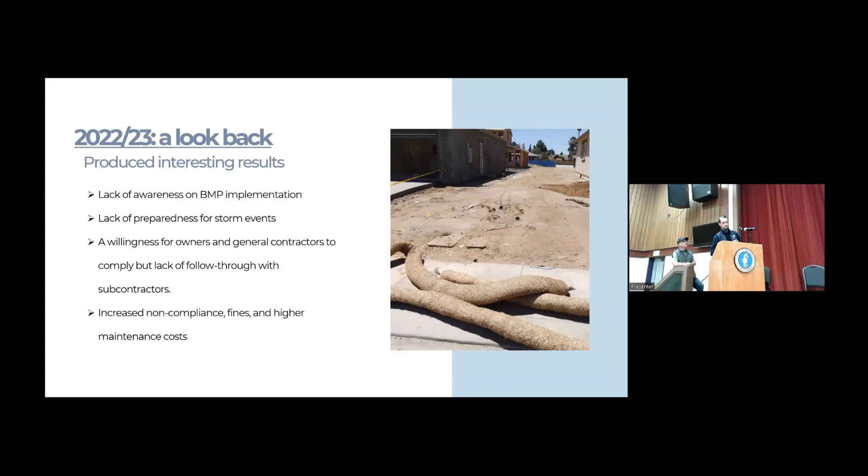So this one is a clear example of erosion, lack of run-on controls, and lack of sediment controls.

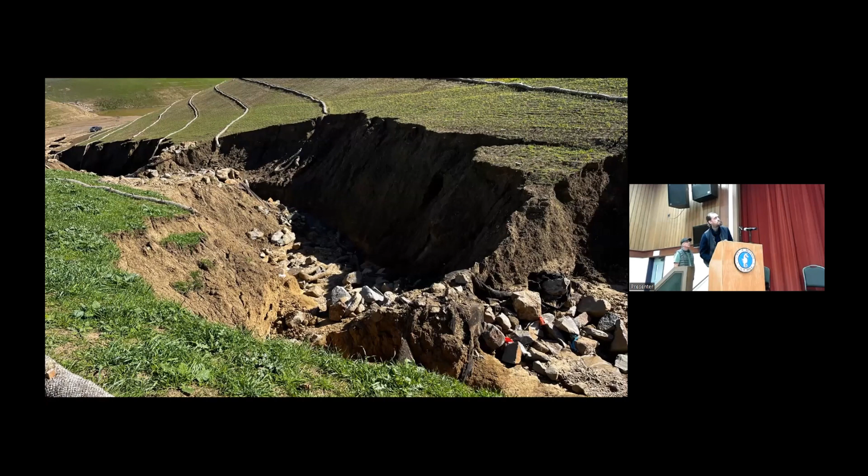This was a site that I inspect where it's almost impossible to really see the vastness of this erosion, but that gulch is a good 50 to 60 feet deep. And this had check dams, erosion controls, sediment controls, like you would not believe. It was really quite good.

But the main problem here is there was just a massive amount of sheet flow, or what you might also call run-on, where sometimes it just doesn't matter. Your BMPs can only get you so far when you have 12 atmospheric rivers hitting you back to back. Sometimes you're just going to be in a world of hell.

But the main problem with this site right here is the lack of terracing, because this is a pretty significant hill bordering a small mountain. Terracing is something we don't actually talk about, it's not something I've really highlighted, but I'm convinced it should be an active BMP because it helps slow the flow in ways that check dams and fiber rolls can't.

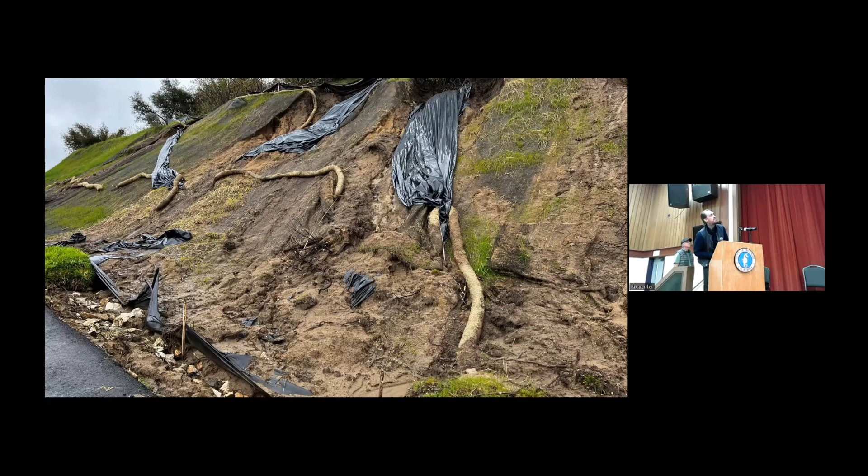So the thing with plastic, it's really easy and we like to use it, but there's probably nothing better that speeds up the velocity of water. And when it comes to velocity, that's pretty much our number one enemy when it comes to erosion sediment control.

So probably here we would recommend an erosion control mat, a blanket, kind of looks like burlap, as opposed to plastic. Much of this stuff is probably going to be pretty common sense, so forgive me for beating a dead horse here.

Sediment controls. As you guys can see here, it's pretty obvious what's happening. The perimeter controls are overwhelmed. That's something contractors don't really like to mess with - when perimeter controls, silt fence, fiber rolls, sandbags, get impacted with sediment, they sort of lose their effectiveness.

And a lot of the times they just don't want to repair or maintain perimeter controls. But it's a huge thing that we need to constantly implement, because as you can see, sediment is overwhelming this perimeter control and making its way into the street gutter.

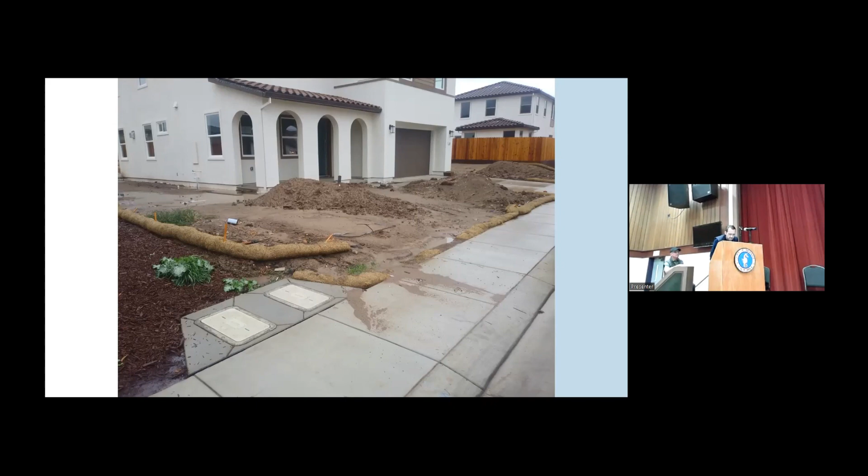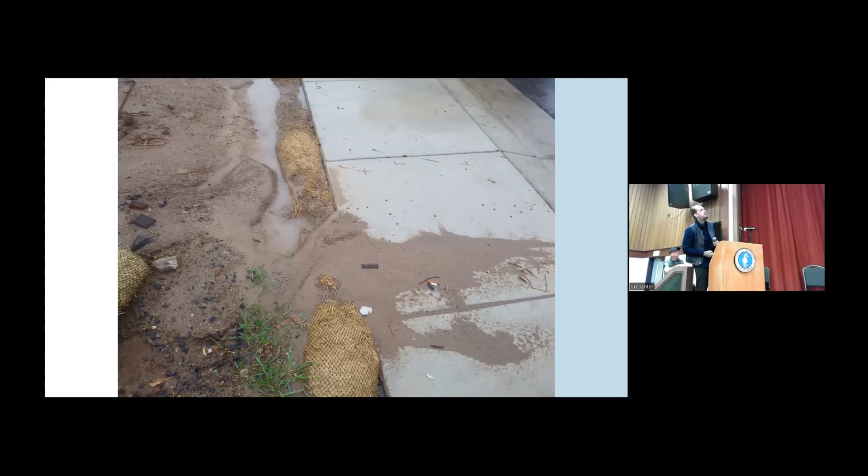More of the same there - just a couple of examples of perimeter controls that have been overwhelmed, and again, overwhelmed perimeter.

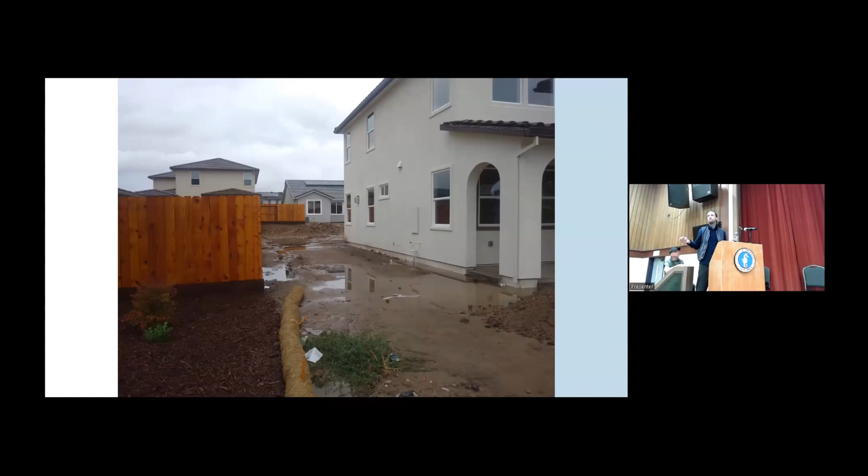The main thing here is just basically a lack of erosion control. Erosion control basically boils down to soil cover, any sort - mulch, straw, erosion control blanket. But erosion control is really the primary step to preventing major problems on your site.

You want your entire toolkit working together, it's almost like a prophylactic - a preventative is what you're thinking about when it comes to erosion. You want to prevent erosion by putting a mat down. You want to prevent the moving of sediment by having properly installed sediment controls, like this fiber roll, which is clearly not installed correctly.

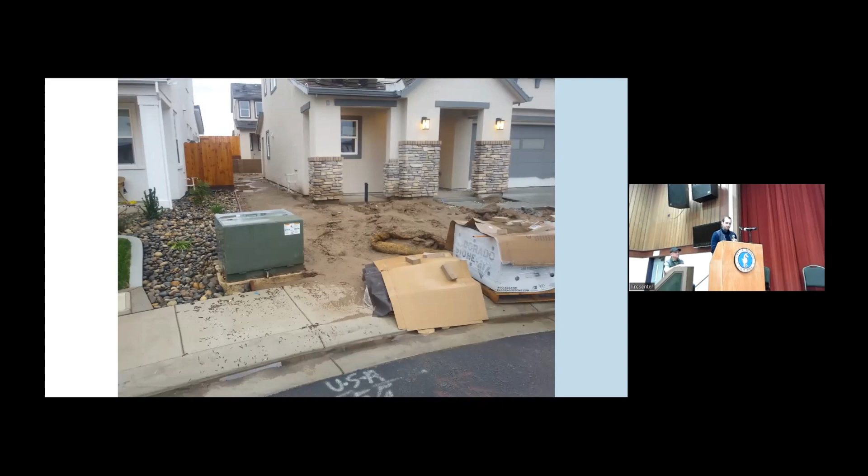This is an interesting one right here. We see this all the time. Now it doesn't look like that big of a deal, but obviously it's not installed correctly because the perimeter controls aren't on the perimeter.

A lot of times contractors will have a problem with this because the fencing will already be installed. They look at it as a serious hiccup and can't figure out how to make that perimeter.

It's really just laziness. It's obvious that we need to hit that perimeter. Wherever there's exposed soil, there needs to be controls.

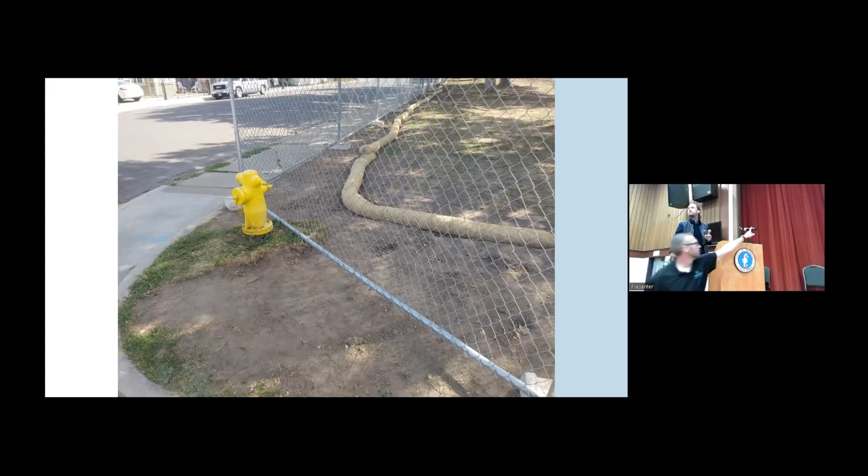Now, this would be okay if the exposed soil on the outside of this fiber roll was all vegetated. If they had either not graded it or if it had natural vegetation, then you could probably get away with this sort of chintzy perimeter control that they've installed here. Because again, one of the number one BMPs that we often exclude is just natural vegetation. So if you can leave a buffer of vegetation around your site, if possible, that is an amazing BMP, and it will seriously help you in the future.

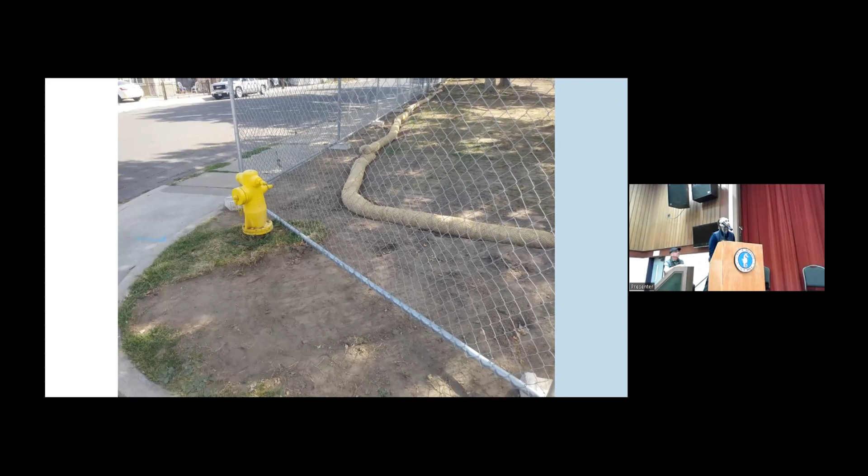Again, pretty commonsensical stuff.

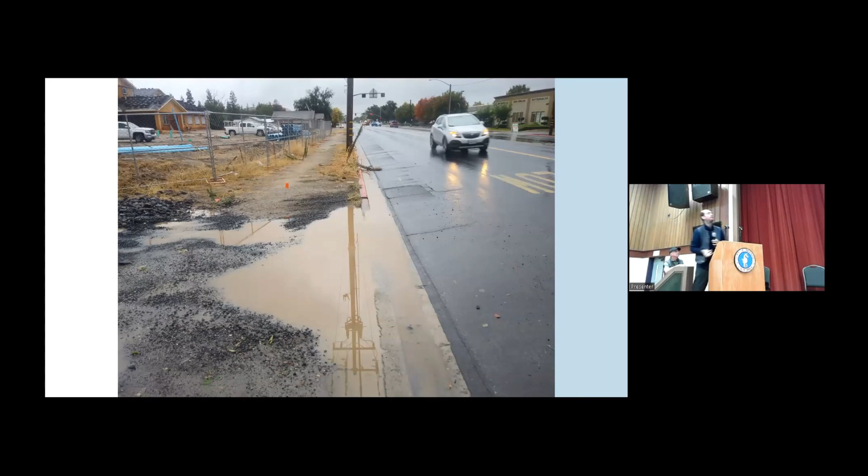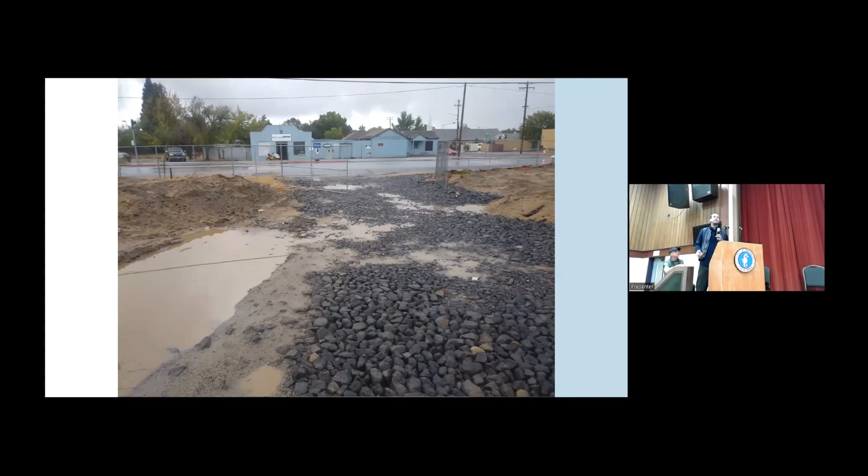Okay, so this is a track out. Now, what's interesting about track out, it's probably the most important location on your site, because usually state inspectors are so overwhelmed, the only way they're going to stop at your site is based on your track out. If they see track out coming out of your site, they're going to know that something else is messed up. If you're willing to allow the public to see such a disaster of track out onto the main street, they're like, okay, there's probably a lot more on site.

And that's what makes them stop, which I have some pictures of track out coming up. But what's interesting about track out is it's also often the lowest point on site. And so it can lead to a direct impoundment of water in probably the most important location on your site, the entrance and the exit.

And so that's an engineering thing you kind of want to keep in mind when you're first installing your track out: if it is at the lowest portion of your site, engineer it so it can take on some impoundment like this, because it's not uncommon for track outs to be filled up with water. But you can deal with it if you've got chunky rock or if you've engineered it deep enough where you can potentially pump it off.

But track out is a really important location on site. As you can see, it's just an absolute disaster. And I'm not going to get into the weeds, but now that we're in the 2022 construction general permit, something like this would actually require an additional permit to get that water off site. And not only that, it has to be implemented, if I'm not mistaken, 14 days before it were to happen.

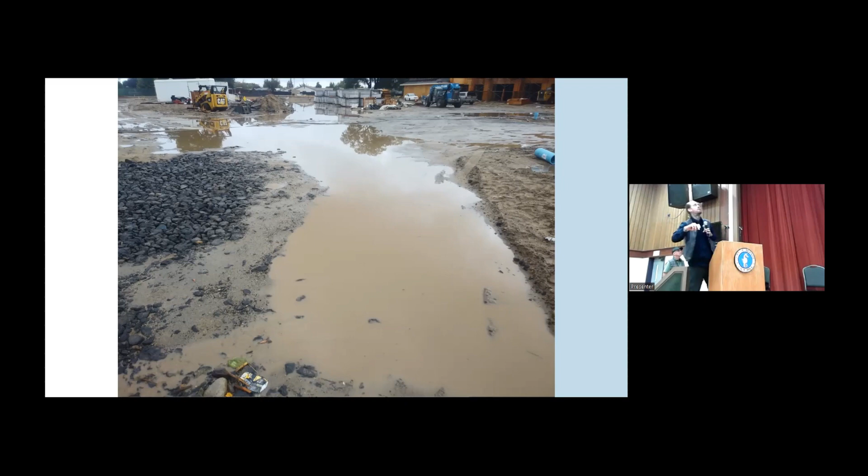Oh, look at that beautiful track out, all installed beautifully, but it's still tracking out. This happens. Sometimes your BMPs, you do everything right, and it's still a mess.

But that's where a sweeping program comes into play. Another BMP. It's kind of a pain in the butt, but sometimes you just got to have your guys with the broom at the end of each day.

You know, really, this rock is actually a little too small. Usually you want that big, chunky rock. But sometimes you can only get what you can get, and you just got to deal with it as it comes along. But all in all, this looks pretty good, but it's still a bit of a mess.

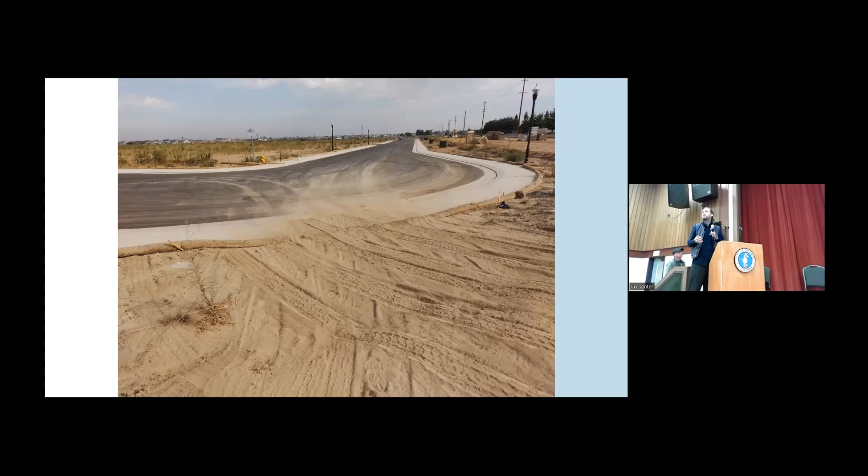This is for sure going to get you inspected by a state inspector, guaranteed. Because if you're allowing this to happen on site, they're just like, this guy's probably got concrete washout going crazy, porta potties tipped over, Lord only knows. But this is the number one way, if you've got a beautiful street without track-out, to keep serious inspectors off your back. We see this a lot where labor subcontractors get lazy and can't even move the fiber roll out of the way. So a lot of times as a contractor you're just running around trying to take care of your subcontractors to try to make them not cost you extra money. It's one of the joys of being a contractor.

Again, more of the same. You see all that sediment in the street gutters. Hypothetically, that's going to end up in your storm system, and God only knows what it's going to do as it keeps building up. For all you municipal inspectors and contractors, if you're allowing sediment into your storm system, I've heard of municipalities sending a robot down into the storm system and finding a ton of sediment. As a contractor, you've allowed that sediment in, and now you've got to get it out, which just means money. So it's good for municipalities to think about that.

These guys aren't listening to us, they're letting all the sediment into the MS4. And contractors, getting on your subs, guys, you can't let this happen. You're going to cost me a small fortune if they happen to check the MS4 prior to closing out the permit.

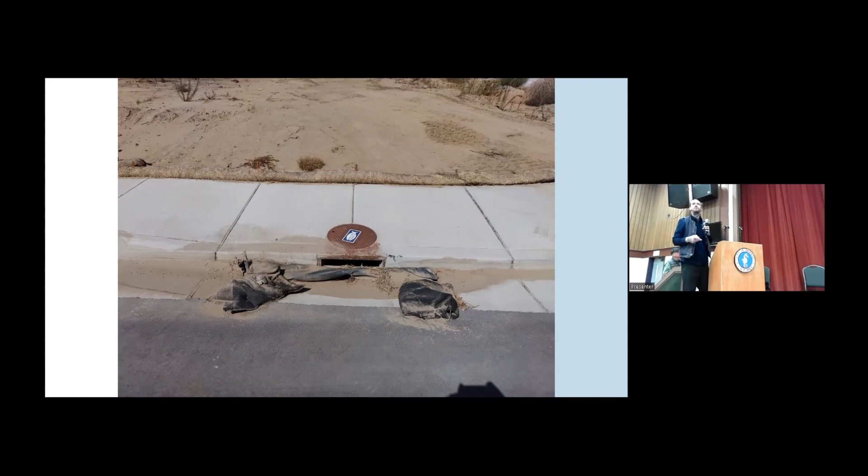In all seriousness, this is going to happen, especially last year when you have insane amounts of sediment coming off your site, you're going to run into stuff like this. It's going to happen, but get proactive—all that takes is a shovel, 10 minutes, you've reinstalled it, and you won't have someone like me freaking out on you when you come across this. And of course, the fish, direct to the river. So, minor details.

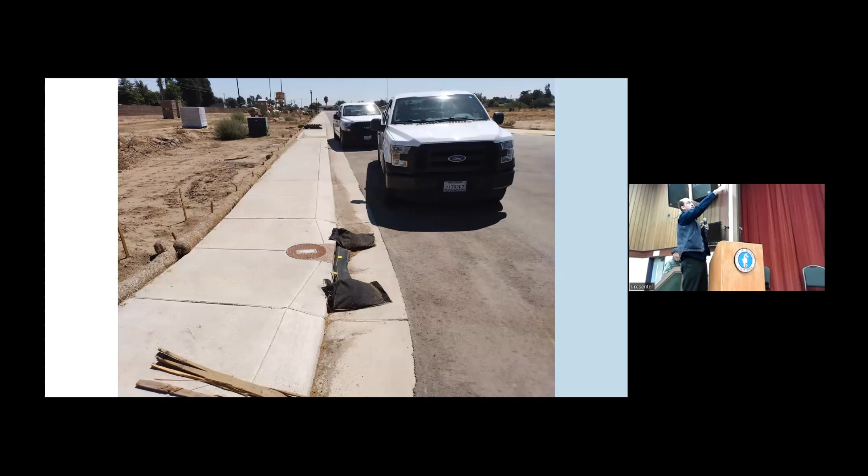This isn't too bad, you can see that the DI has pretty much done its job more or less. It's still a little rough, but the perimeter controls are pretty decent. There are no erosion controls though, so you probably wouldn't have any sediment at all if you had solid erosion controls preventing sedimentation in the first place. But at least that DI, they tried on that one.

Again, more of the same. You just want to get out there and remove that sediment if you can.

Okay, this is interesting. You can tell their heart was in the right place, but they've pretty much taken probably half a block's worth of BMPs and put it on one DI. You should probably take one, maybe two of those bags every 150 or so feet and put a little check dam.

I always try to remind people that you have a permit to discharge. You're allowed to discharge. Most people think, oh no, don't discharge—no, you don't want your water building up on site, you want it off your site. But what you're going to try to do is discharge water that's not packed full of sediment. So this right here is definitely going to catch sediment, but it's also going to create a terrible pooling effect.

I'm sure a lot of contractors and municipal inspectors will go around and see sandbags kicked away from the curb from when the storm has come through, and you're like, hey man, your sandbags are screwed up. And they say, well, it was puddling, what do you expect, am I supposed to have a puddle here? It's like, well, you do want the water to get through, you don't want it to puddle up that significantly. What you're trying to do is create a little catch basin with the sandbags, kind of like panning for gold, how when the river comes down the gold would deposit in a little spin out.

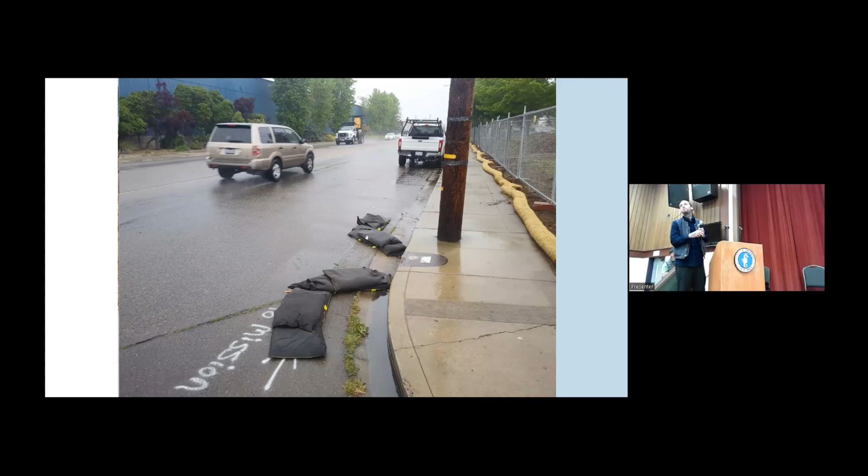Sometimes it needs 2 bags, sometimes 1, sometimes you need to prop the bag up. It depends - sometimes the street gutter is at an intense slope, sometimes the curb itself is higher than the average curb. But it takes a little trial and error. You want it to discharge, you just don't want excess sediment in your discharge.

This is actually a good example of run-on, even though it's technically erosion control. Not a lot of people understand that run-on can occur from your own site. Like if you have a site with perimeter controls, you'd think run-on, run-off controls are part of the 5 BMP categories - it's the 5th category. Run-on you would think is a site next to you running on, their water coming onto your site and impacting it. And run-off is water on your site that's leaving.

A lot of people don't understand the concept of run-on. They only think of it as someone else's site running on, but actually run-on generally happens from your own site. From the higher to the lower is run-on. From a roof to the ground is run-on. A lot of people don't understand that you usually cause your own run-on, and your own run-on causes you your own problems.

Because technically this is a lack of erosion control that led to a run-on from the top to the bottom, from the top grading to the sidewalk. So this is just something to keep in mind - more than likely a lot of your problems are going to come from your own run-on. I'll have another example.

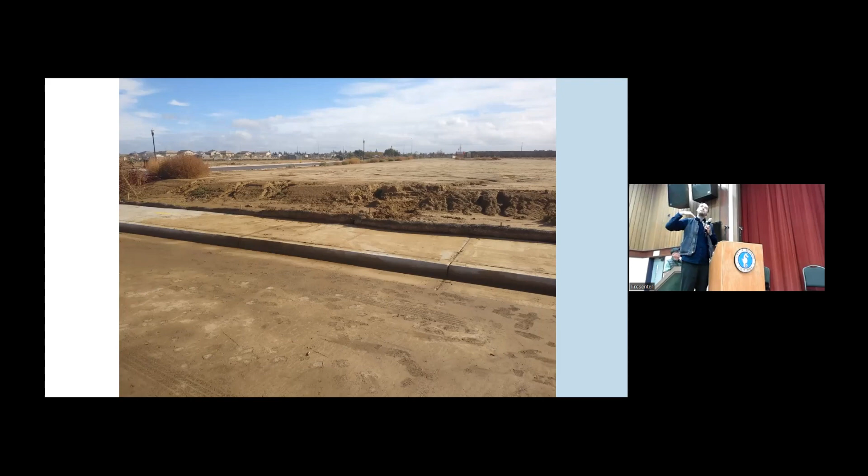This is a beautiful site. You can see there's just no issues anywhere. Good erosion control, sediment control. The street looks beautiful. It may just be because it washed all the sediment down into the gutters and we can't see it, but we'll just say it's a beautiful operating site.

This is probably what a lot of sites will generally look like, maybe your sites as well. You've got BMPs, a little messy. It's an active site, so when someone like me comes on site, I'll look at this and be like, it's a bit messy. You got a little track out, some stuff in the sidewalks and street gutters. But I understand it's an active site, so I'm not going to break the balls trying to get all over you for this because you're clearly trying.

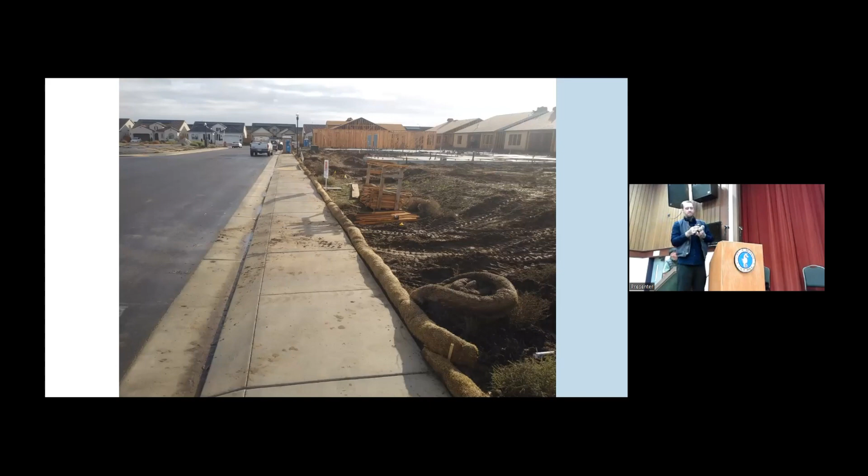So that's something you always want to stay proactive. If the inspector comes on site and sees BMPs, sees guys trying to mess with BMPs, they're not going to nail you with the fine right away. They're going to give you a little bit of time, some correction period. So this is a little bit messy, but they're trying. And that's always what you want to do - you want to be active.

Here is seemingly everything is somewhat going all right. You got your stockpile covered, you got your sediment control, but here's where you have no erosion control and run-on that's likely coming from the roof, impacting next to the house - impacting the house, sorry - and creating a little rill that will eventually overwhelm this fiber roll.

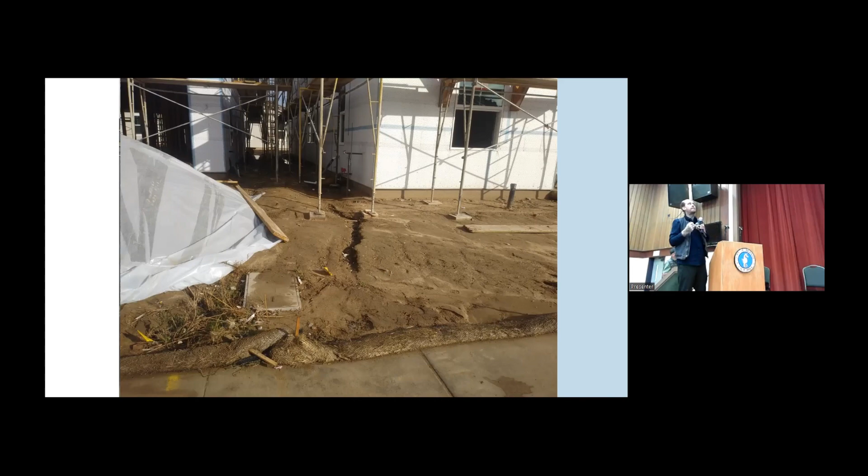So really, like I said earlier, it's a combination of erosion control and sediment control that's really going to save you when it comes to run-on, runoff controls and all other kinds of things.

Again, more of the same: good sediment control, but the lack of erosion control is making it so the sediment control is about to be overwhelmed.

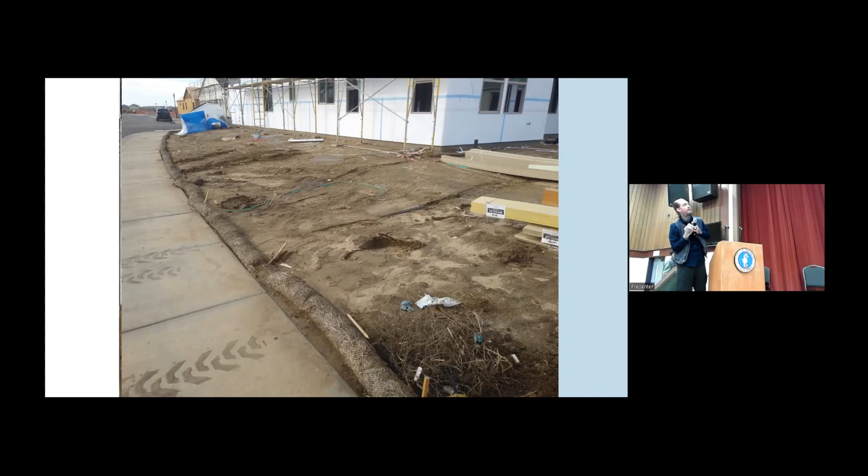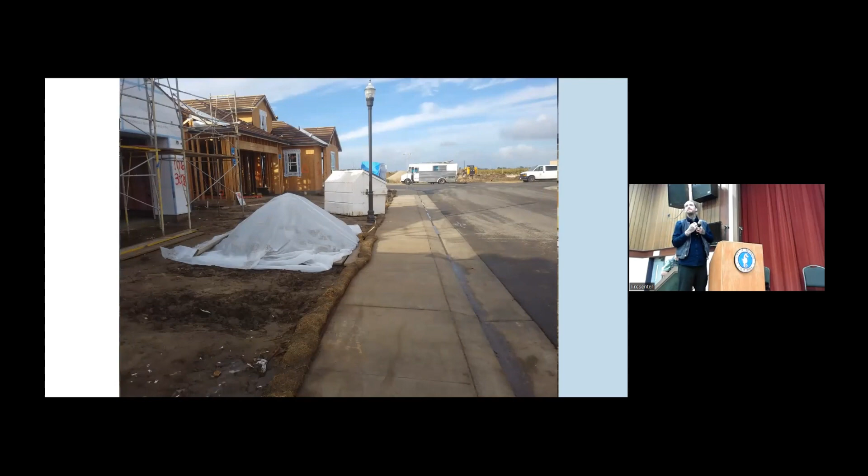This isn't my favorite, but it's okay. It would be nice if the stockpile was moved back from the perimeter, but more or less this is properly installed. It's not perfect, but we can't be too psychotic about these things all the time.

Okay, this is no bueno. As you can see, we've had some clear discharge, some runoff. It's really tough to tell from this picture, but you clearly have some sediment in the street gutter, so you'd have to go up gradient and figure out where the breach is.

This is, again, lack of erosion control, and you can see just how it erodes the material so rapidly.

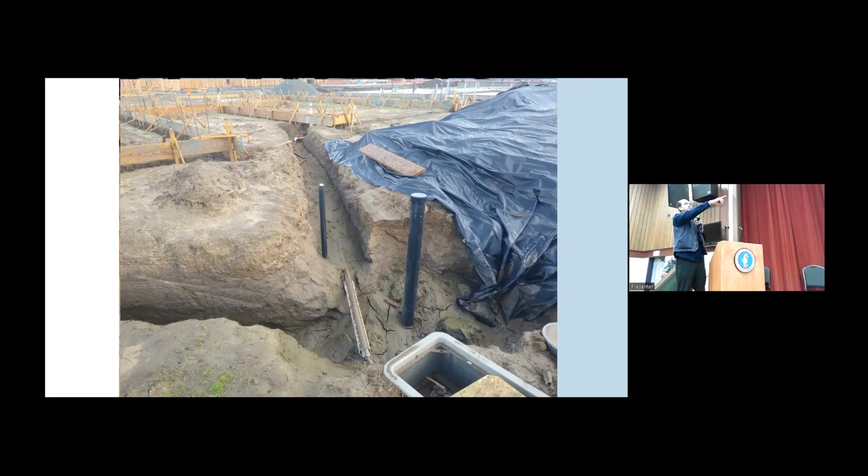I'm trying to find one specific picture. Well, this is similar to the one I'm looking for, but here's runoff control. So you've just done all this underground work, put in all your piping and everything, and you have a storm with erosion controls that are clearly only barely making it. What happens is run-on from your site fills up all those trenches. Now, perhaps that's not a terrible thing, perhaps you weren't filling it with different forms of rock. I doubt it. But if this is a problem, this is going to be a major problem, because that's guys with a shovel.

There ain't no easy way to get around this. Run-on can absolutely destroy sites regarding time and efficiency if you have to have guys out there with the freaking shovel and a bucket doing this.

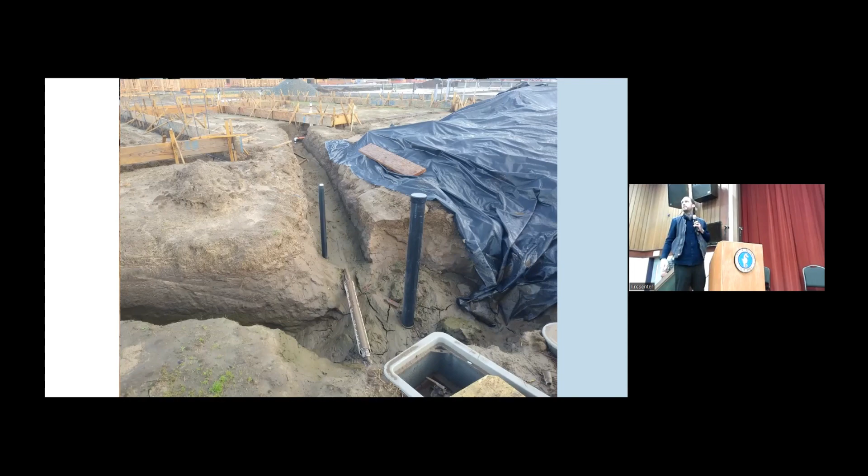Again, imagine if you're doing grading. One of the best BMPs I forgot to mention, probably the most important BMP, is literally scheduling. It's pretty obvious, you probably don't want to do grading right before the rainy season, but you can see here that run-on from the top has filled up where all their streets and sidewalks are going to go. God only knows how much that's going to cost them to get the grading crews back out.

And then some, because it looks like they have some underground work already installed there. So again, this is a nightmare, an absolute nightmare for a contractor. And we saw it happen this year at a number of sites.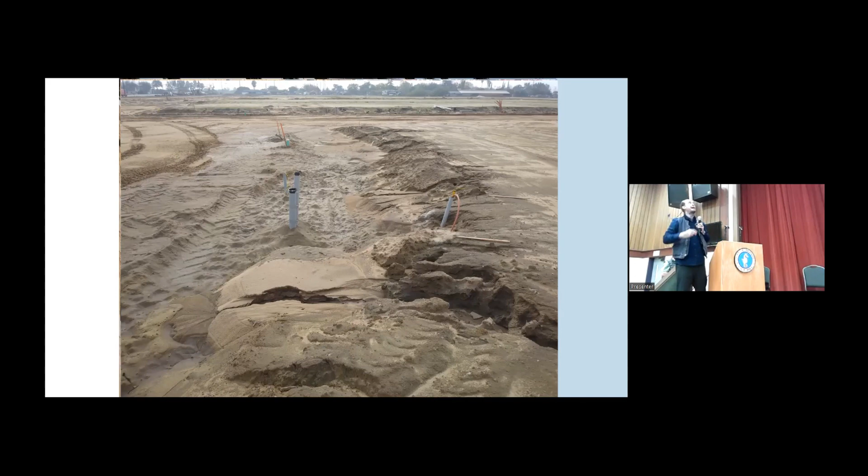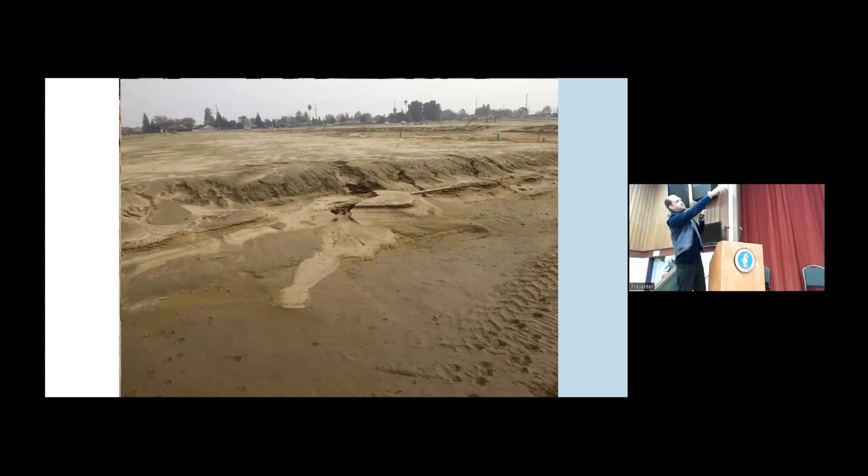This is a site that I was trying to find. You can clearly see you've got erosion from the top, which is running on, causing rills, and you can see the sediment spilling out here and filling up that nicely graded area. Again, more of the same.

A lot of this would be prevented from erosion controls, generally a hydro seeding of some sort, which is what all y'all should be thinking about right now. You should be starting to schedule your hydro seeders, or at least getting them on the books sometime around now, because these guys are limited.

Once the rainy season comes up, they are just absolutely swamped, because there are so many procrastinating contractors trying to get everything done before that, since they don't want to have that hydro seeder come out twice, and usually it's like 10% left. Then they don't get the hydro seed in, the storm comes and just absolutely obliterates their site, when maybe they could have just had a 10% obliteration as opposed to 90% or the full hundred. So hydro seeding, you guys should really be thinking about that now.

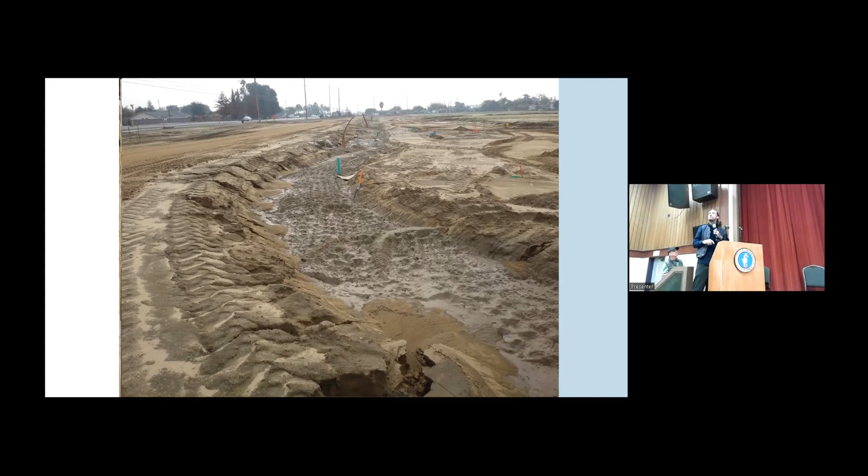Also, there is a difference between just hydraulic mulch and hydro seed. A lot of the time people want grass to grow from the hydro spray, but it's not hydro seed, it's just a sort of hydro mulch. So that's just some food for thought. If you're actually wanting grass to grow, sometimes you actually have to pay that extra expense and get the seed installed into the spray. More of the same.

Again, run-on coming likely from the top, but it looks like we've got some material spills up there, which is just adding to the misery.

Erosion controls prevent wind erosion. Obviously, if you have a mat over exposed soil, it's generally not going to erode away. The main source of wind erosion comes from stockpiles. That's why in the new CGP, they want contractors to stabilize stockpiles at the end of each workday. I'm sure that'll be lovely for all of you. They don't specify how to stabilize them—generally we see plastic thrown over it with a fiber roll berm. But luckily, the CGP gives a little leeway on how you do that. I won't say exactly how you should stabilize your stockpiles, but you can get creative.

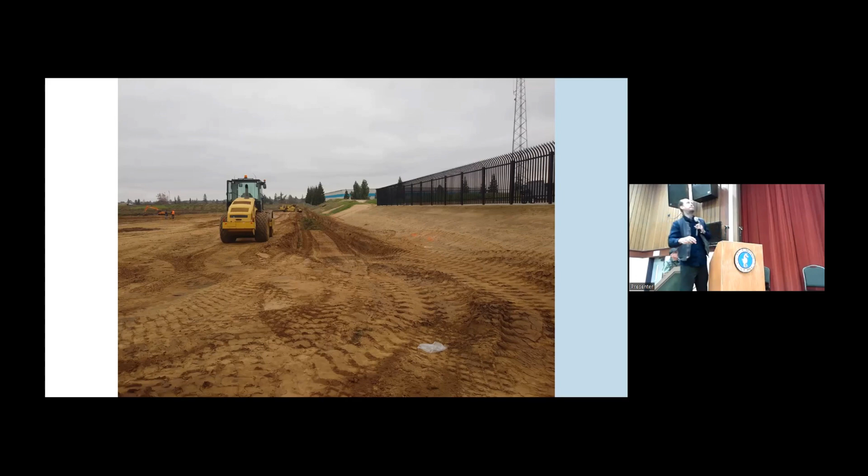Okay, more wind erosion, run-on and run-off controls. Run-on controls are going to come from the top of this slope down. One of the best ways to prevent run-on is to put a piece of fiber roll on top of the slope—just the easiest way to prevent it. And also, if you can, cover the slope either with a spray or some sort of erosion control mat. It's an expense, but it's beneficial in the end.

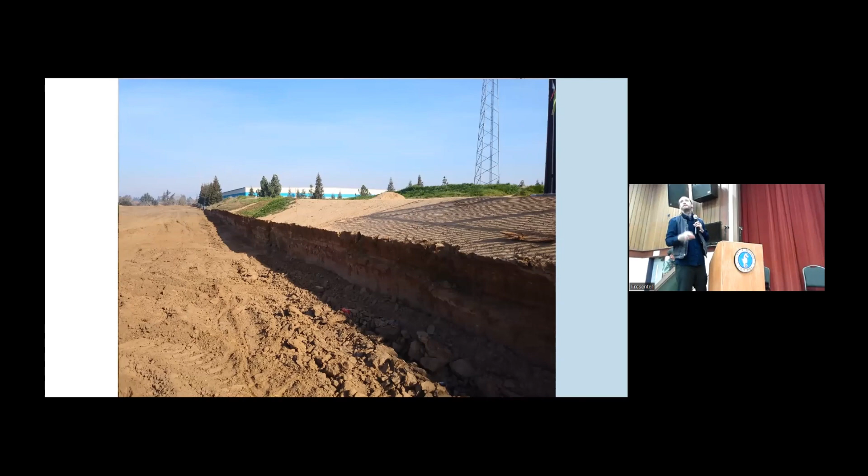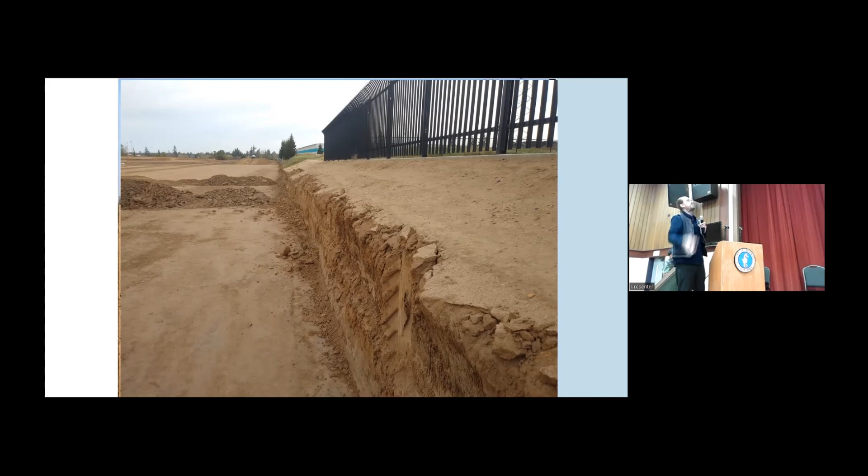So here we have, let's see—okay, this is what you can see the storms coming in. We've not only exposed everything, but created this beautiful straight line for water and sediment to pick up speed and send off site. And here you have it—you can clearly see the sediment, the erosion on the slope, and all this really could have been prevented, number one with proper scheduling, number two with erosion controls. It's just a nightmare if you don't take care of this beforehand.

Again, more of the same run-on coming down the slope. It looks like a silt fence, but that just looks like an edge. So then you're going to have water coming down and free-falling that small distance, pounding into the ground, creating more erosion. It really is a nightmare.

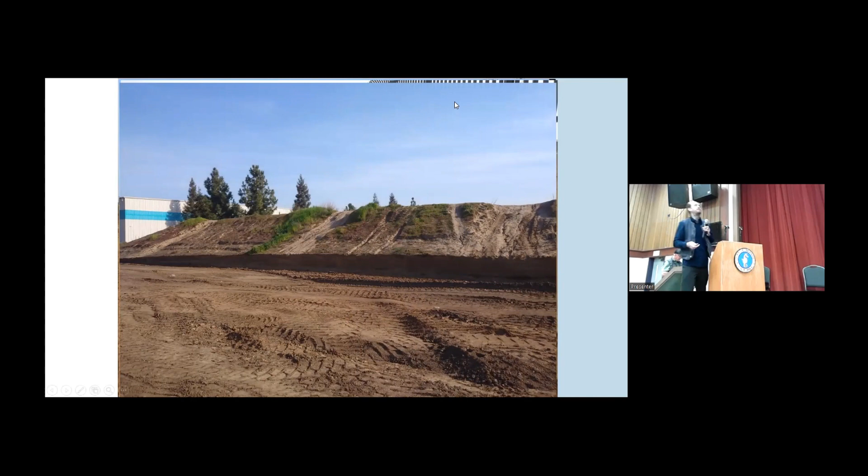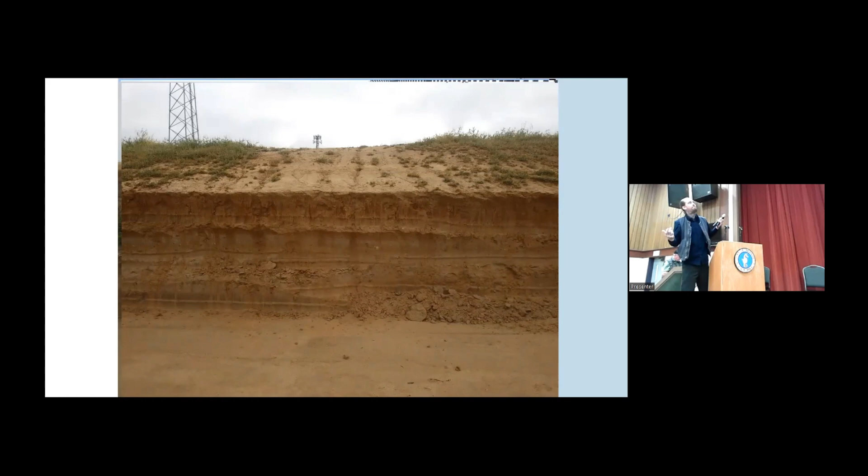More of the same, much more of the same. If I'm not mistaken, this was supposed to just be a clearing and grubbing. This is always what happens—it's just supposed to be a clearing and grubbing, and then they cut 4 feet down into everything. That's okay if you're prepared with your BMPs. Sometimes you just have to handle business, and your grading guys can do a lot more than you anticipated, so there's nothing wrong with that. Why not do it? But you just want to be prepared if that sort of thing happens.

More of the same—erosion on the slope, run-on. This was that slope; it could have been a lot worse. It's probably just the density of the material that prevented more damage, but we would obviously recommend some sort of erosion control matting.

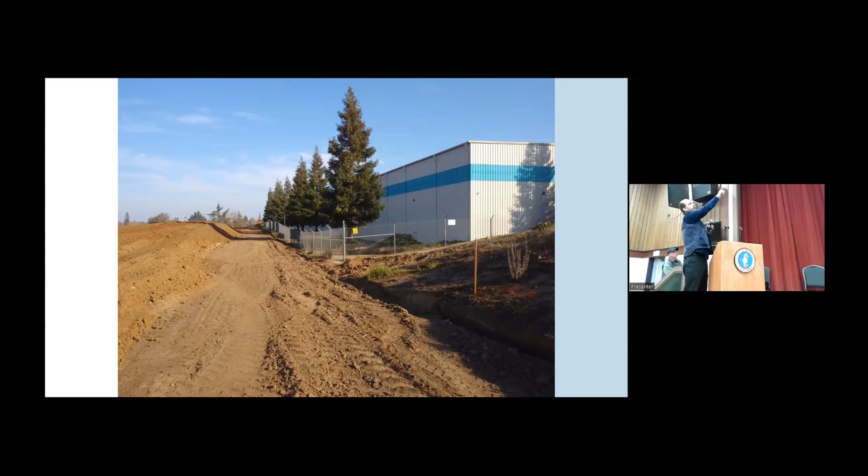Okay, this is interesting—tons of exposed soil, and the discharge point, if I'm not mistaken, is right around that fence. This whole site has nothing but impervious ground all around it, so if it does get impacted by sediment-filled water, it's just going to cover the site. There's no grass, nothing to absorb into, so it's a direct threat. This is direct run-off—well, it's run-on from your own site and a run-off threat to your neighbor.

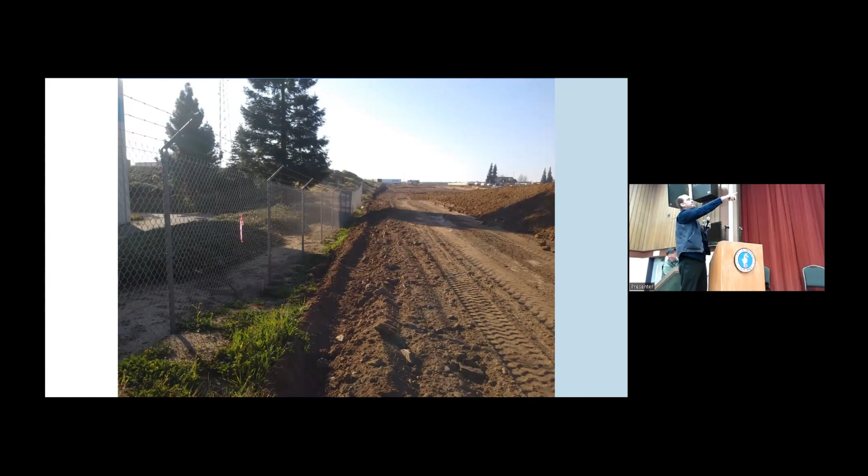And if I'm not mistaken, in this slide it mentions that the discharge point is right here. Our company brought this up to the contractor, who ended up doing more of the same. And what's interesting here is the track walking.

Track walking is a great BMP, but only if it goes horizontal with the slope, right? Because this is sloping down, so what do you think the water is going to do in these nice, beautiful, pre-made rills? It's just going to speed up—everything is going to erode faster versus if it was going horizontally. So that's kind of what we're thinking about when it comes to track walking.

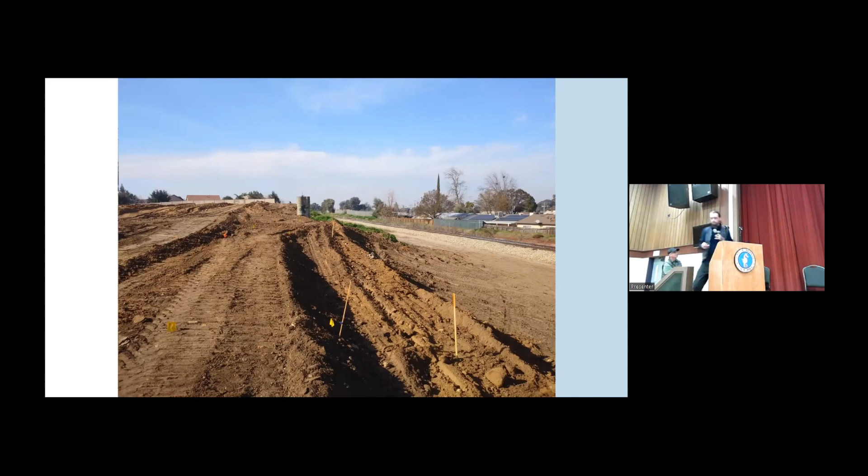More of the same, going downhill completely. Okay, so he actually put in some BMPs, but he didn't have a QSD or QSP, and he didn't take any consultation. He just sort of knew, like most of us generally know what fiber rolls and DI controls are, so he installed it, but he didn't stake it down, didn't key it in, and obviously didn't put it on his perimeter's edge.

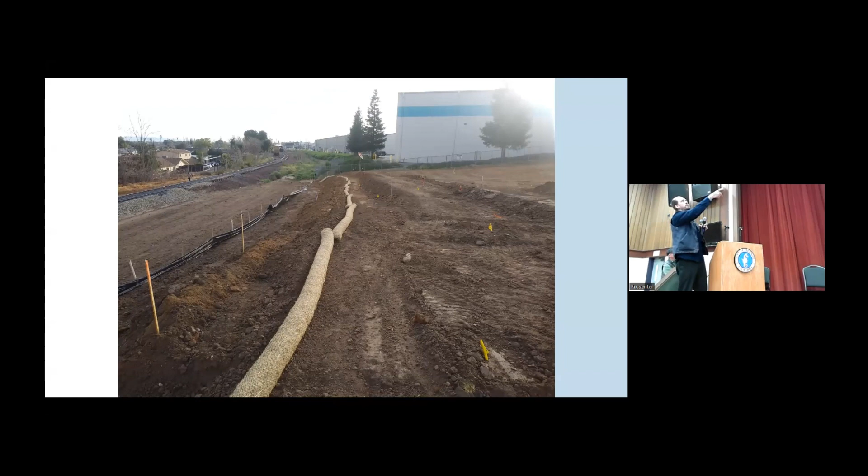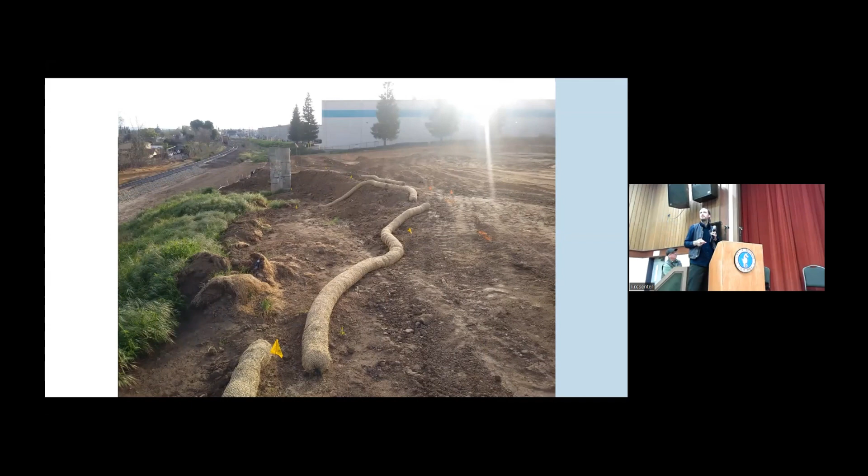He's got the silt fence here, so he's trying, and this is what happened because it's not installed correctly. And this is what happens - just massive erosion. So it really does matter. It's a pain to key in these things, to key in a fiber roll. It takes your guys a while. It's not an easy task, but it really does help.

Again, this is just silt fence, same thing. A lot of people don't key in the silt fence - key in, where you dig a little trench and bury it, it's called keyed in. It's incredibly important for silt fence to be keyed in. Again, because we have lack of erosion controls, you're going to have run-on, and you're probably going to have runoff. This is that same site.

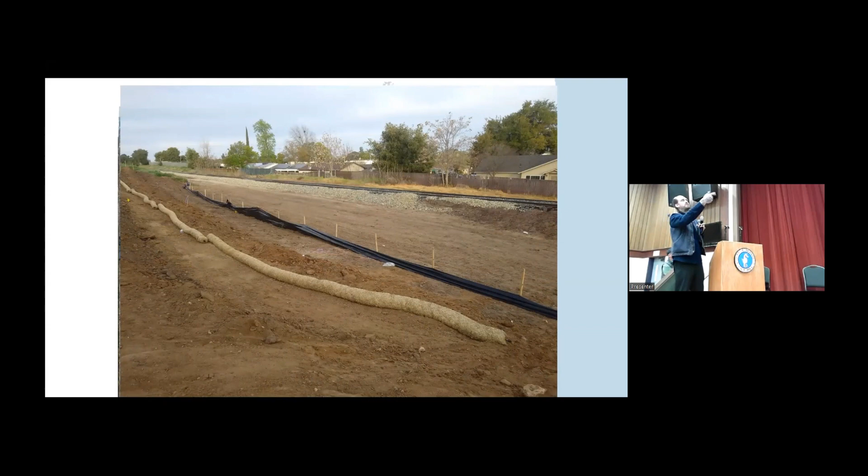Laying down the fiber roll - it's just not going to do anything. And then not maintaining your silt fence, not keeping it stapled in. This is just common sense stuff, and you can see this is just laziness. Again, these are super effective BMP controls, when done right.

More of the same. Okay, non-stormwater. We're almost there. Non-stormwater, maybe the most confusing but not confusing thing - what is non-stormwater? So let's see what we have. This, if I'm not mistaken, was just a water truck.

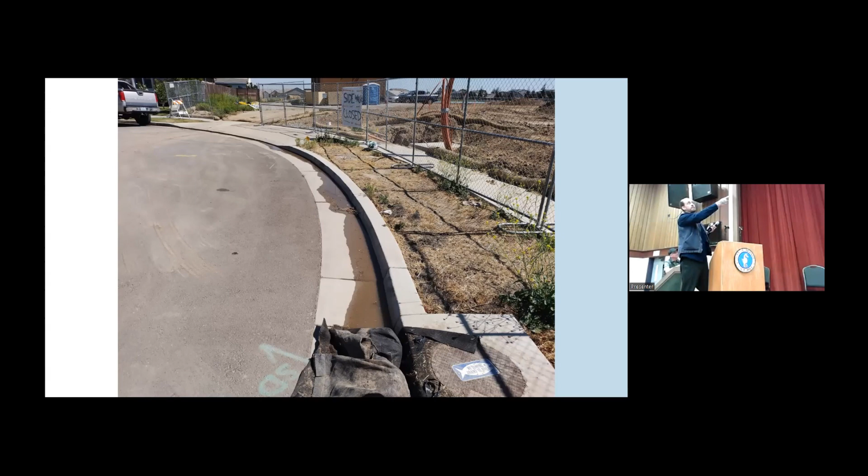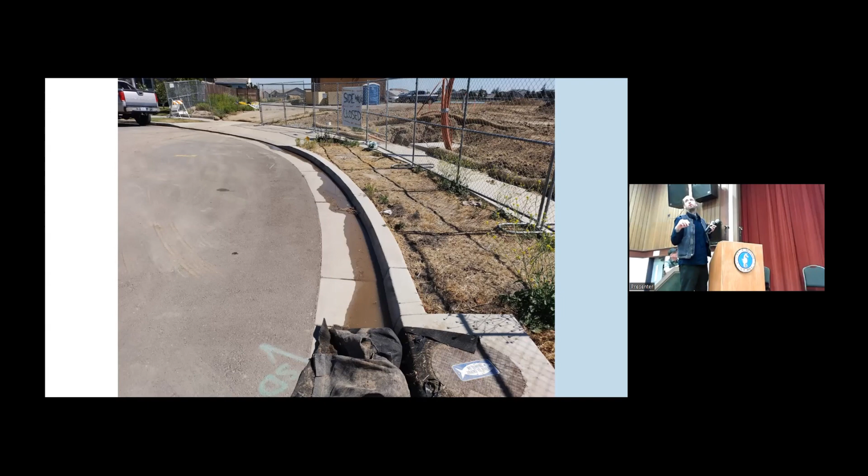Water trucks come in, spray your site down, add water to whatever. A lot of times they do it right at the track out. They spill water all over the place, and it creates a discharge. So technically I should sample that, and I would be willing to bet, due to just the visual sediment I can see, that it's going to probably be above 250 NTUs. So that means notice of violation. Okay, same thing.

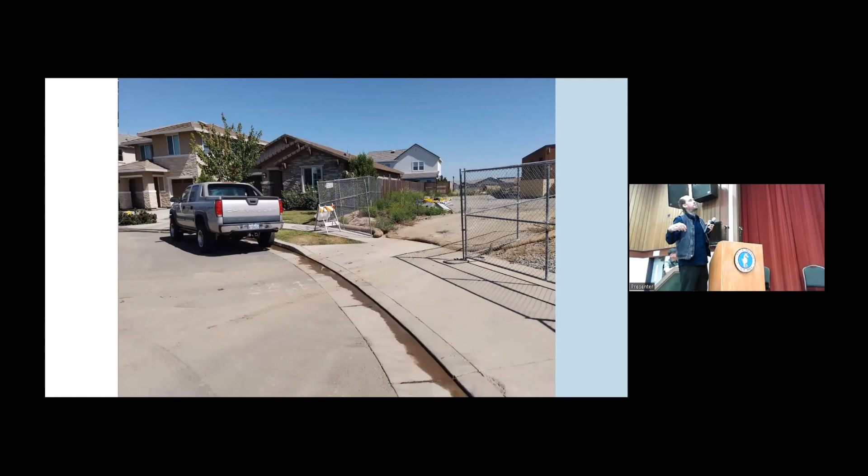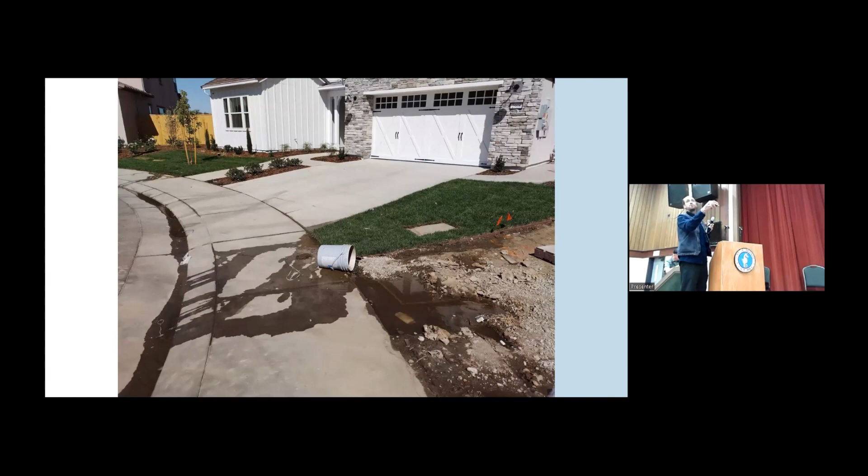So non-stormwater would be the truck wash water. It would also be irrigation. This is probably the most common form of discharge that I see on site, especially with new developments - sprinklers always break, always. I'm sure there's one or two men in here who have had a few issues with sprinkler heads in their day. But yeah, so this is a great example of non-stormwater discharge.

More of the same, more of the same. Oh, I don't even know what kind of hell that is, but it looks like maybe drywall of some sort. I have no idea, but there's obviously no perimeter controls, or if there are, they might be buried. I see a stake. So you've got a stockpile with material all over it - non-controlled stockpile, no perimeter controls, no erosion controls. And here, I don't even want to know what's inside that water.

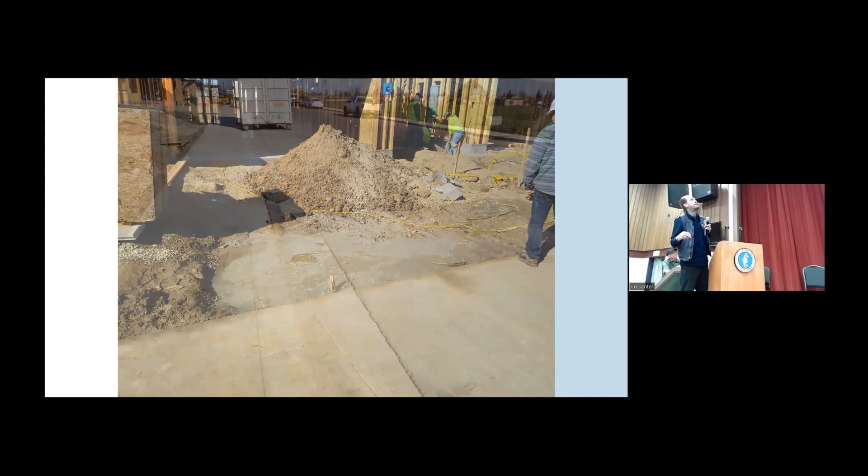This is what a lot of sites look like actually just prior to the storm season, right? You're not necessarily tracking out, but you've got sediment and dust everywhere. So this is maybe not something you can really do a whole lot about, apart from putting a broom to it. You're just going to want to be really proactive on your DI BMPs, because you're like, okay, my street is filled up with sediment and dust, I'm probably going to discharge some pretty sediment-laden water, so you're just going to have to monitor those DIs during the storm.

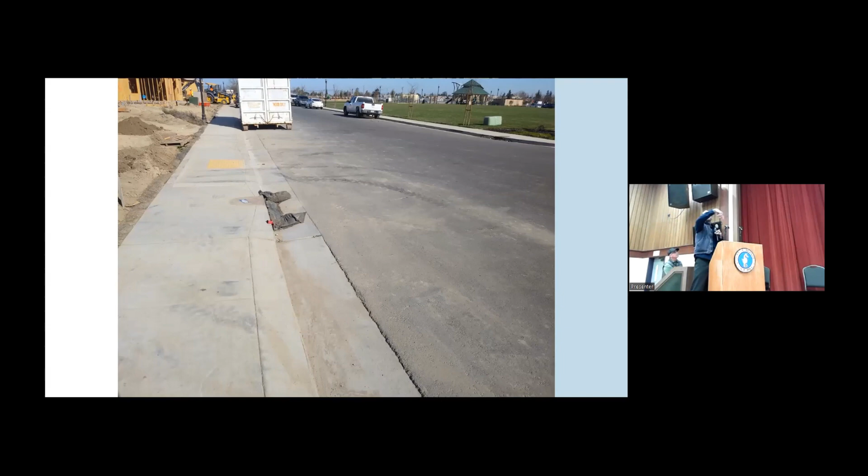Because you can't really do a whole lot about this level of sediment in your street. But this is just very common. Also, as a side note, I see the trash can in the back - trash cans can also be forms of discharge. So usually you want to tip your trash can, the front end up just a hair, because if it fills up with water - since they generally don't have lids like they're supposed to - you get that nasty trash water coming out, which is a serious non-stormwater discharge. Technically it's stormwater, but once it mingles with all that other stuff, we can consider it non-stormwater, and it's right there next to the DI.

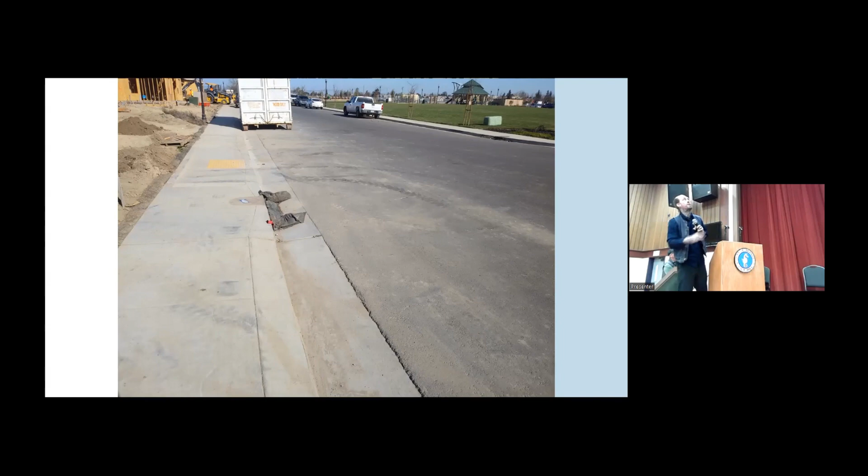So again, another thing to keep in mind - as you can see, this is drywall material, perhaps concrete. I think it's probably drywall.

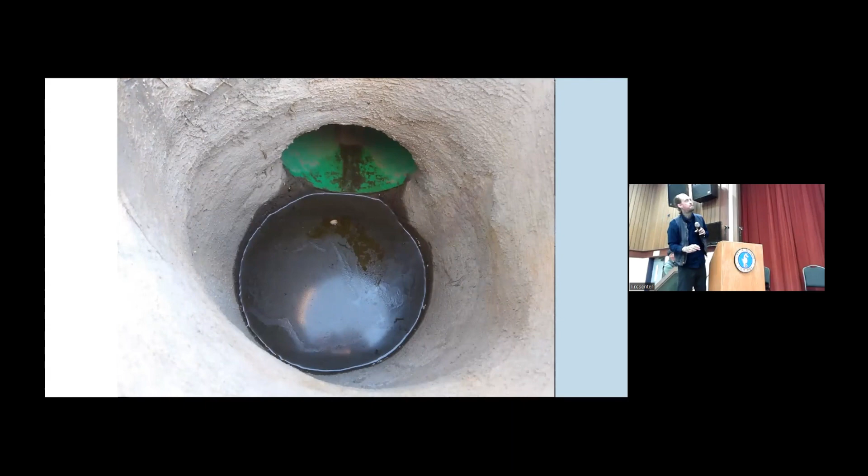Again, that's a nightmare for the storm system. And as you can see, that beautiful oily sheen, and you can see sediment in the drain right there in the green pipe. Bam, that right there for municipal inspectors.

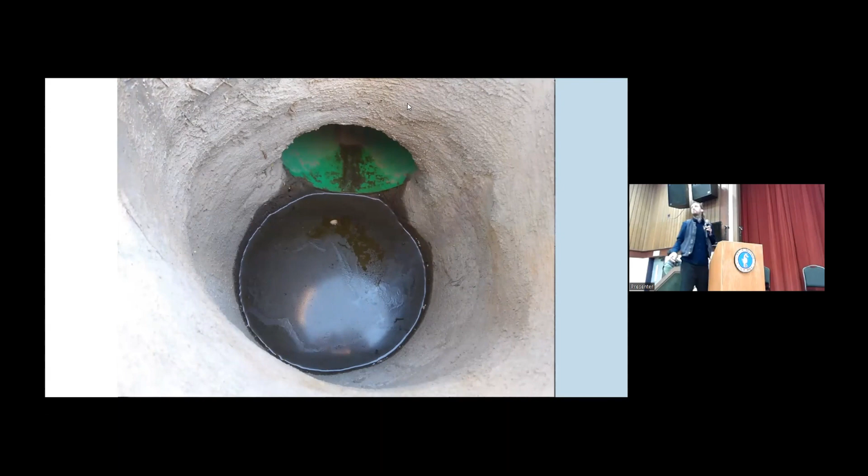This is an important thing to watch out for, and this is for all you contractors. Again, you don't want this, because they can tag you. Oh, we had to send robots in there. Oh, imagine how much it would cost to clean out sediment from that. Just imagine, because who knows? It's whatever they want to say, because it's such a pain in the butt to do that.

So this is really something that I'm always telling contractors to be mindful of: no one cares about sediment control until you start talking about, hey dude, your MS4 is probably filled up with sediment, and you better hope to God they don't send a robot down there because you're screwed. You're like, oh no, oh no. Again, just absolutely terrible.

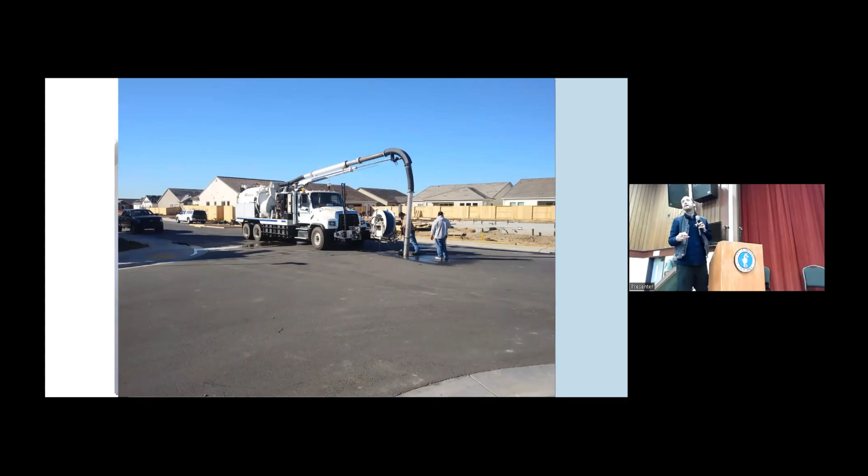And this turned into an actual fine where they had to have the guys come out and actually pump out the storm system. Again, this is just, oh boy man, this is crazy.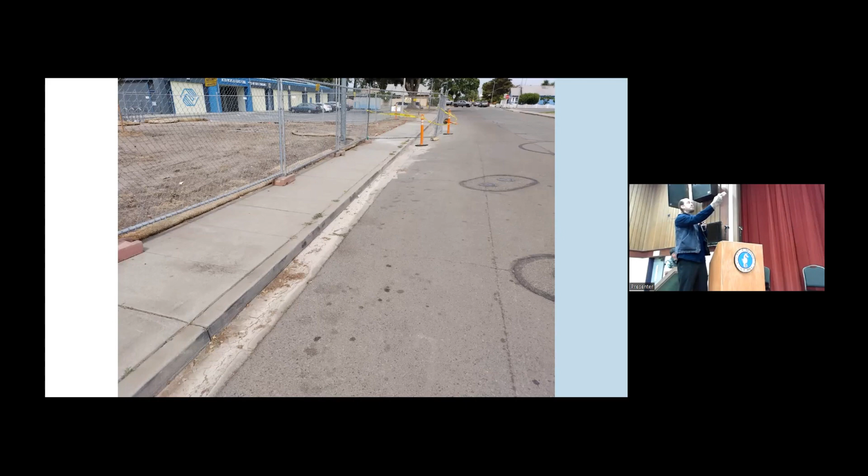Now, I always get a little bit rude maybe, because I will get on people by saying, look, you guys, I know probably you don't want to listen to me banging on about this, but there's nothing more important than our water and our soil, right? If there's anything that all of us can get behind, barring all politics, it's our water and our soil. And so you should care about this stuff as contractors, as municipal people, because this is going right into our drinking water, right into the fish, into all the rivers, and into the soil.

More of the same. Good housekeeping. Good housekeeping is basically going to be the end all be all. It will prevent everything from happening negatively to you.

This is just washout spills. So good housekeeping obviously is providing a washout for your crews. Some of the ways you can get around washout is if the concrete guy is washing out directly where they're pouring, that's maybe something I get a lot. Well, the guy's washing out his concrete truck where they're going to be pouring a sidewalk in like a week. Give me a break, right? Is this really an illicit discharge? The rational side of me says that's fine, of course. But the compliant side says, nah man, you need a washout. So compliance and rationale don't always line up as they should, but we try.

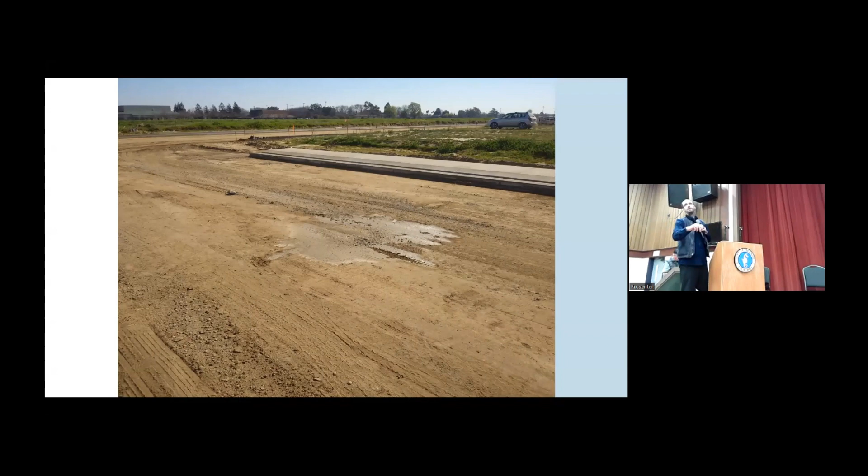Again, washouts. See, this is the classic example, right? They laid down the curb and gutter, and then they washed out the truck right where obviously the street is going to go. So am I really going to give the guy a hard time because they're literally just going to put more concrete or asphalt right there? But yes, technically, if I want to stay in compliance, if y'all want to stay in compliance, if an inspector comes and sees that washout there on that exposed soil, it's a violation. So it's kind of a pain in the butt.

And usually a washout can be as simple as just a kiddie pool. It can be those huge bins, but it can be as simple as a kiddie pool. It becomes a little bit of a pain to deal with, to off-haul it, you know? But that's what most concrete washouts consist of these days, just a kiddie pool.

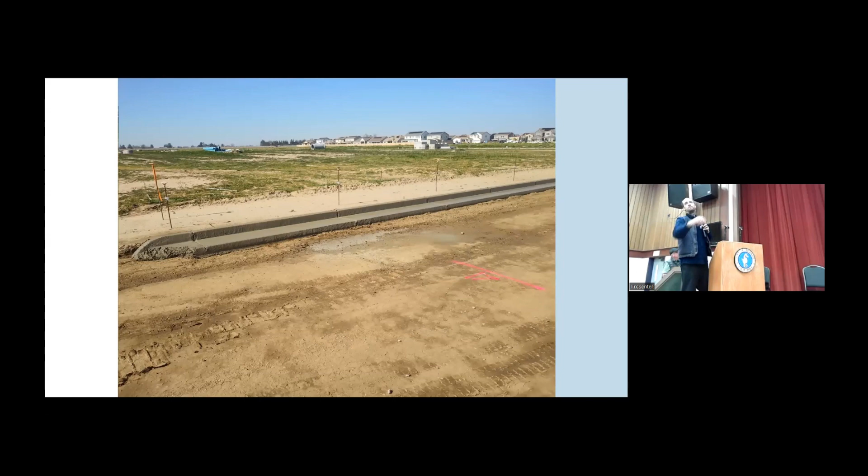And this is kind of, yeah, the guy's right. He's washing, can't really tell, but he just washed his chute out right there. And of course, eventually this is going to be a street, but it's not a street yet.

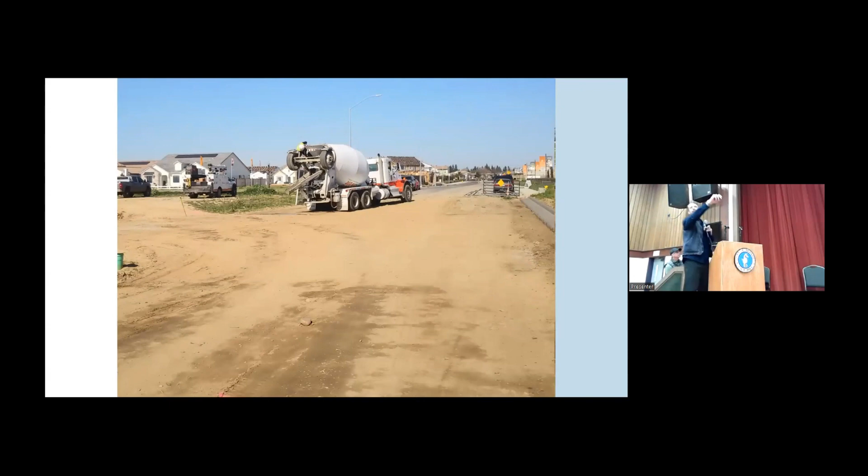But if you're on top of it, we always say you should always have a spill kit and a team on site. The spill kit is essentially a shovel and a bucket. It can go a long way if you have one or two guys dedicated to cleaning up any spills, because there are clauses in the new permit regarding non-stormwater that say if you mitigate it quickly, and it's not a catastrophic spill, then you're not subject to sampling. So a spill kit and a few trained guys on site matters, because it's something a state inspector will ask: do you have a spill kit and trained guys on site? When we go out and train people, we always make sure there's a guy on site who's been trained with a spill kit, and he always knows where it is. It's one of those things.

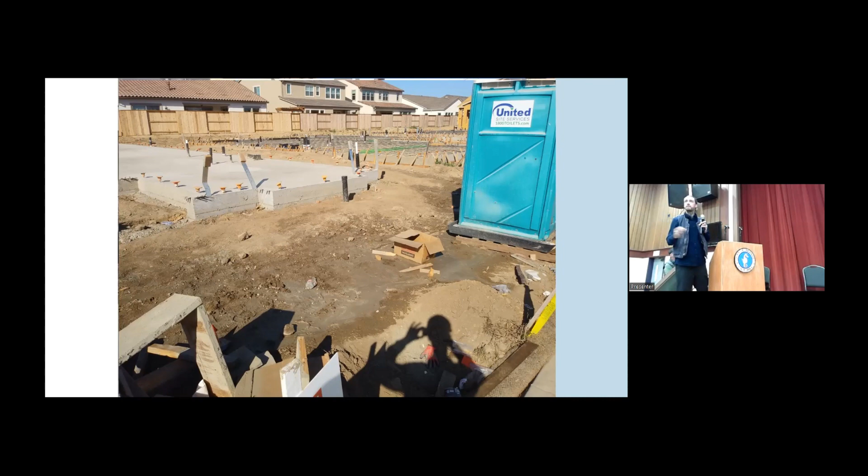It looks like maybe here the porta potty potentially tipped over, and they tipped it up real quick and just went about their business. There's really no cleaning up a porta potty without a non-visible pollutant sample. It's kind of one of those things where if you dump over your porta potty, you're probably going to have to be forced to sample. But if it's something small and quick, a tiny little puddle, and you can mitigate it quickly, it'll save you a lot of headache.

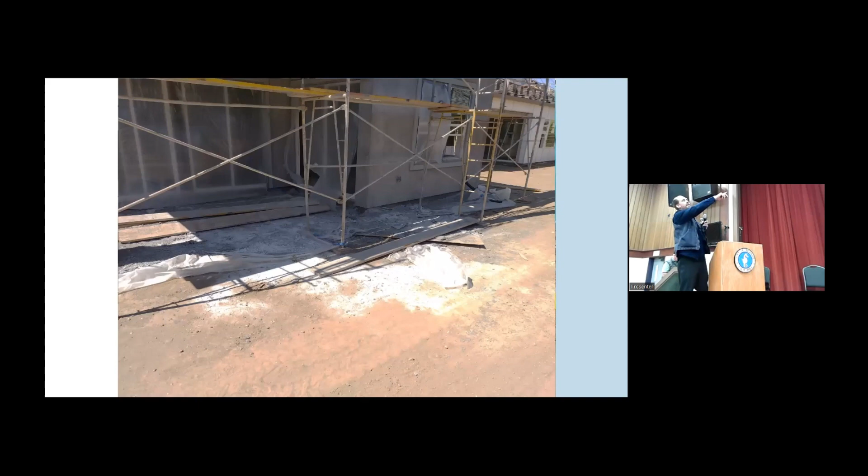Again, probably drywall guys are nothing personal, but they're probably the most messy, contaminating crew you'll have on site by far. They just naturally are messy, it's part of their game. It's not a knock against them, but it's always someone you've got to watch. If you've got drywall along the plastic perimeter, you can deal with that, but the drywall on exposed soil, that can't happen.

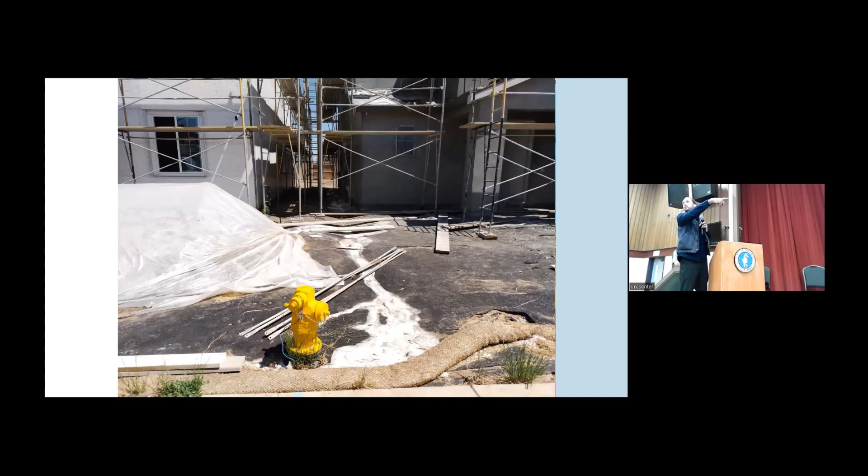Again, luckily they have the erosion control mat, good sediment control. So you can see right here, even though this looks a bit like a mess, actually their BMPs are working, because it hasn't left the site, it hasn't seeped into the exposed soil. This is actually an example, in my opinion, of good BMPs with a bad situation.

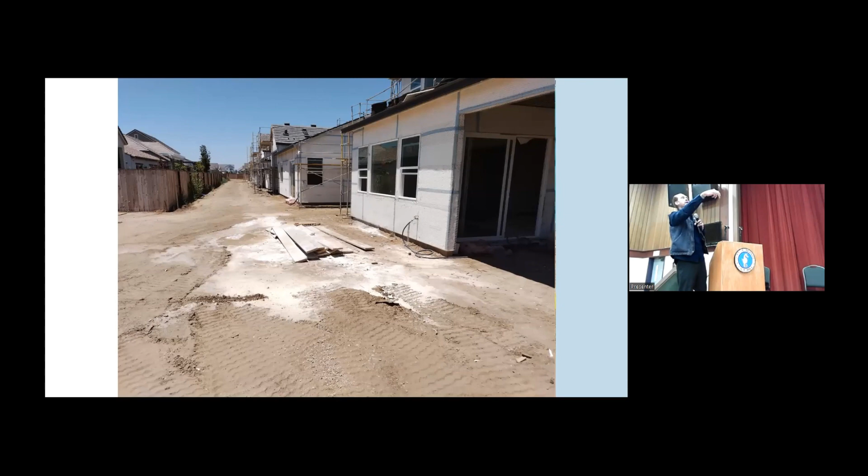Bad situation, no erosion controls, no care for anything apart from getting home on time. This is always nice too when you find these out in the middle of a field, so be wary of that as inspectors, contractors, whatnot. Sometimes your guys will get a little tricky and try to plop that material spill out in the middle of a field where you won't see it. But us inspectors know where to look, we always find it.

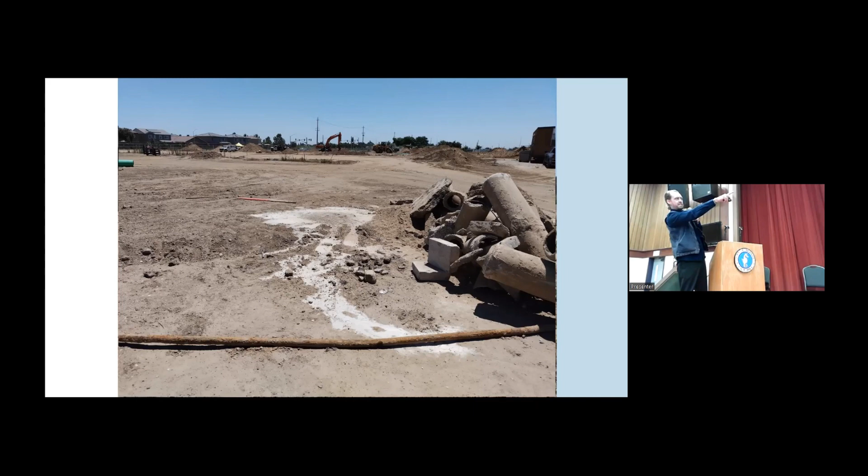Again, here you can see the fiber roll. Is this a fiber roll? Might even just be a pipe. Might be a pipe, okay. But yeah, material spill, all bad. Jeez, please. What can you say? What can you say?

All right, I'm being told to speed it up because I talk too much. Get to trash, of course. Come on, BMP. Let's put it in the trash can, put a lid on it, because this is going to create all kinds of hell.